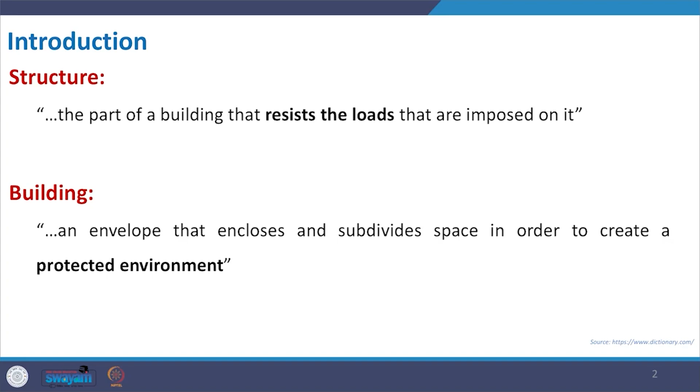Now, what is building? We learned the definition of architecture, where it was said the articulation of space with the application of technology and different science into it. Now, let us see the definition of building. It is an envelope that encloses and subdivides space in order to create a protected environment. I mentioned in lecture number 1 that in the primitive age people started building because they had to protect themselves from external dangers. It may be from the weather, it may be from other animals.

So, this safety, the protection, was the need to make something called shelter, and this envelope we normally name as building. A building may be a single room, like the lecture room I am standing in now, or a series of rooms put together to fulfill our need. For example, in a residential building we have bedroom, drawing room, toilet, then kitchen area. So, basically it is the division of space as per our requirement.

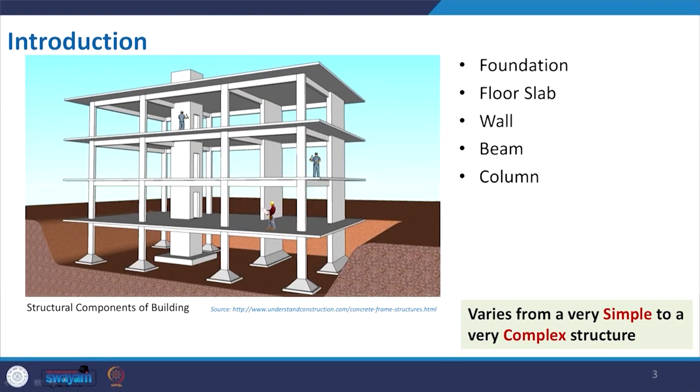Whatever I mentioned in this slide is very basic, simple, straightforward building, like an apartment building with a simple design and concept. Looking at the picture, we hardly get any idea about the material to be used or other functions. The moment we make it more complex, playing with different concepts and requirements, such as a convention hall where we cannot put a column in between and need it obstruction-free, the structural composition will change. So whatever the components of a structure, its parts and parcel, will vary from simple to complex structures.

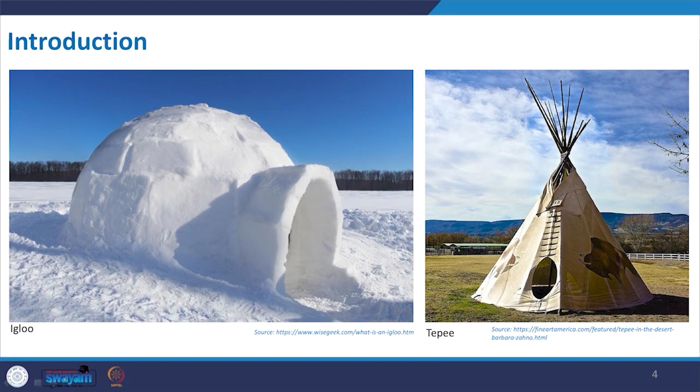Just as I mentioned compressive structure - compressive means if you compress any object, say for example this pen. If I give pressure from both ends, what happens inside it? It tries to compress, but since I cannot put enough pressure on it from both sides, the change is not visible to you. But if we perform it with a higher load, it will definitely collapse after a certain time.

There are structures that are tensile in nature as well. The conical structure is well formed and protects people from the weather. The concept behind both of these is basically to protect from the external environment, whether it's extreme cold weather or a scorching summer. As of now, these two are very simple to construct.

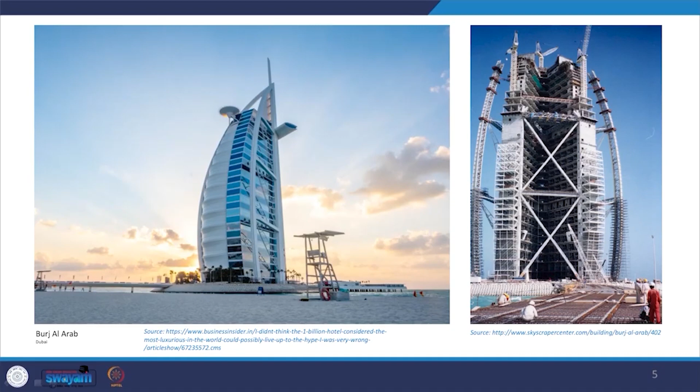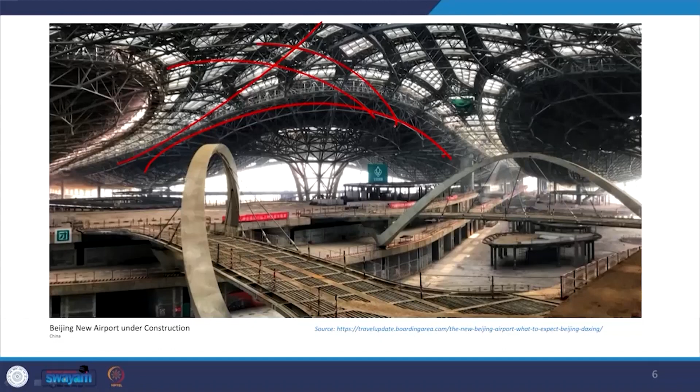You can see those different curvatures, and here not only at the roof, they play with different curvatures at different axes. It's basically creating that particular environment, that particular enclosure, with some flow. So in order to make it happen, we have to design the structure accordingly.

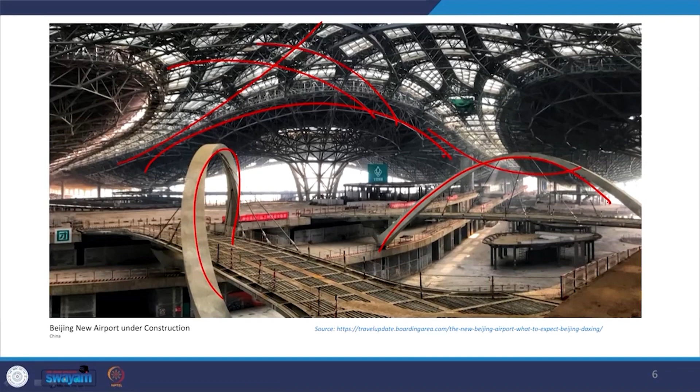Now, we have two ways. One, we restrict ourselves with a very straightforward composition and compromise our concept, we cannot go beyond that. But this is the time where we should go with what we want, and we support it with different structural advancement, and we apply technology to make it happen.

The moment we get a requirement that we need this much space, this type of space, we start generating different concepts, how we can make it purposeful, how we can make it different from existing ones, so that it makes a contrast to existing buildings and all will appreciate. So, to bring that wow factor into our building, we should really play hard in the concept stage.

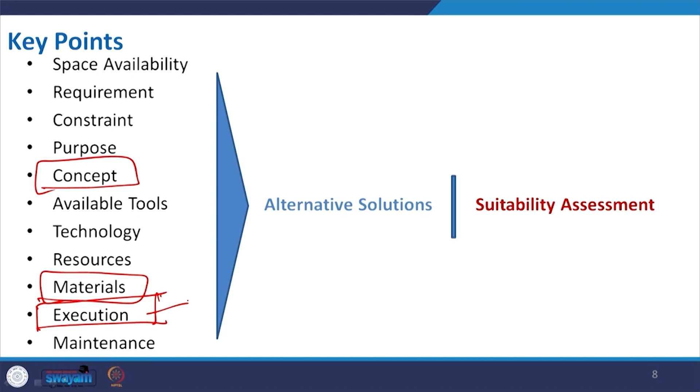Before we move to the next slide, let us understand simplicity and complexity. You can see I have a plain piece of paper, very simple. I can use it for writing, or if I fold it, I can make an airplane out of it. So with a plain concept, a plain blank paper, we can create many things.

But think about the structural point of view. If I try to hold this paper, it is not possible, because of the self weight and all. But if I just fold it, now it is standing. This type of structure we will discuss in the section when we discuss different types of structures we use in architectural field.

This is a folded plate - if you make it like this through trial and error, you get something like a letter M or W, but frankly speaking, it can also carry a load. Suppose if I want to put this slide changer on this paper, it cannot hold the load, I am scared it may fall. But with this folded form it may act as a stand without any external support. This is the beauty - a plain slab converted to a folded plate slab can solve many purposes. We will discuss this in detail.

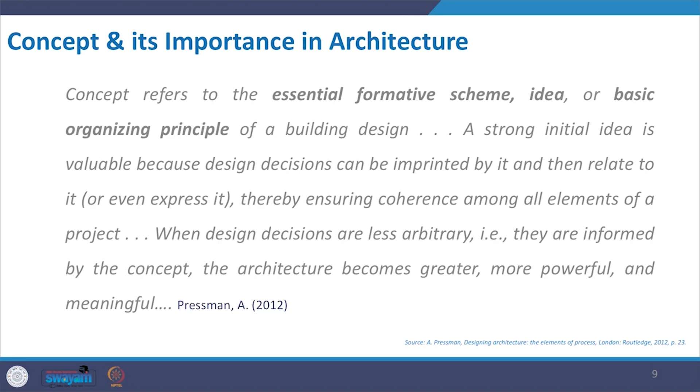Let us move to the next slide. In this lecture we primarily focus on the concept. What does Pressman say about the concept? Concept refers to the essential formative scheme, idea or basic organizing principle of a building design. A strong initial idea is valuable because it will be implemented, which requires cost, energy, manpower, everything. So that is very vital, thereby ensuring coherence among all elements - the space available, the structure to be used, everything is related to the concept.

Based on a book authored by Charleson, 'Structure as Architecture', concept and structure have a relation, and broadly we can classify concept into 4 pairs: order versus chaos, stability versus instability, static versus dynamic, grounded versus floating. Looking at the terms, we can get some idea what exactly they mean.

When you call something in order, everything is order, meaning it is very simple, straightforward. Chaos is scramble - like this abstract art I draw, it may be an abstract art but it is creating chaos, where I just make this arrangement. We can say order is like a 3 column, 2 row composition array.

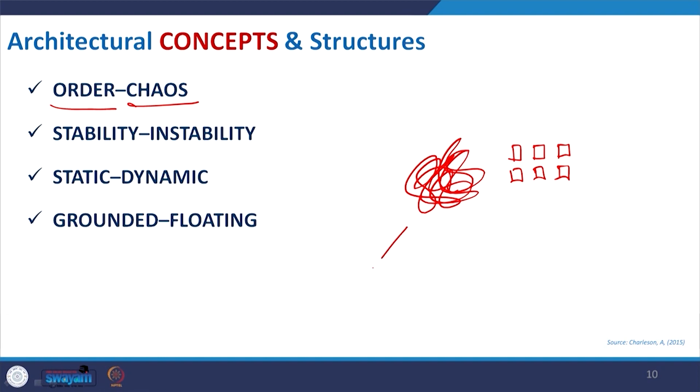Stability and instability - stability means, for example, this is an elevation from a site of a pyramid, and this is the ground. We can say this structure, this form, is very stable. Whereas if I make it inverted, it is assumed to be very unstable, but that is not a challenge because we can make it happen - there are buildings which have this.

Static means very straightforward, where we have a composition like this, and dynamic relates to the flow, which changes or gives motion when you look into the building.

We will have some curvature and other things. Then grounded and floating. Grounded means it has a feeling that it is anchored with the ground, whereas floating means it seems to be floated, but exactly it is not the real case, visually we will see. Suppose a building having heavier mass, standing on a very simple and narrow structural element below, this seems to be floating. So this is the overall idea.

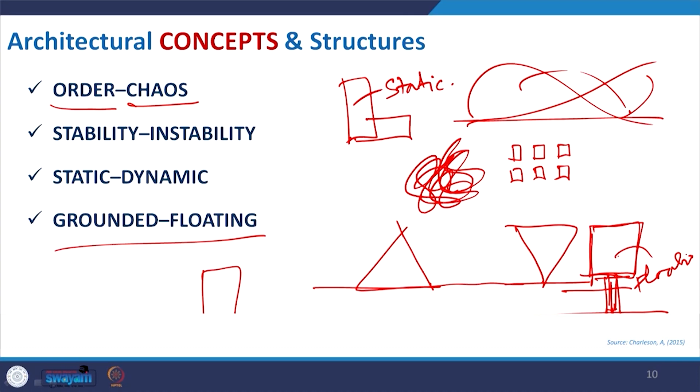Let us understand through a different case study. This is again a nice example given in the book Structure as Architecture, the concept of making architecture from order to chaos, and how it changes.

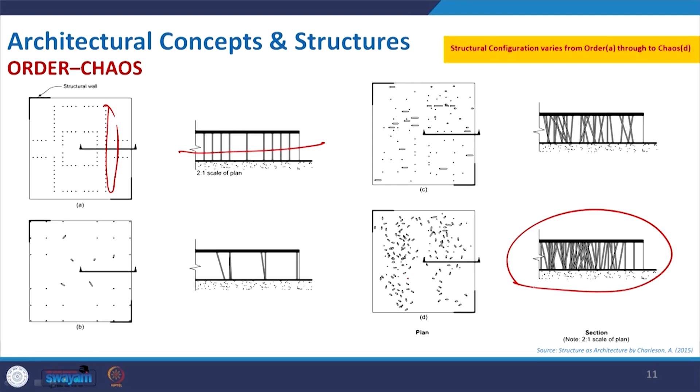In this plan, the dots are all columns placed in order, creating a very ordered form of architecture. Then when you start rotating it, it moves towards chaos, and finally when made very random, it creates this picture. This is the conceptual image.

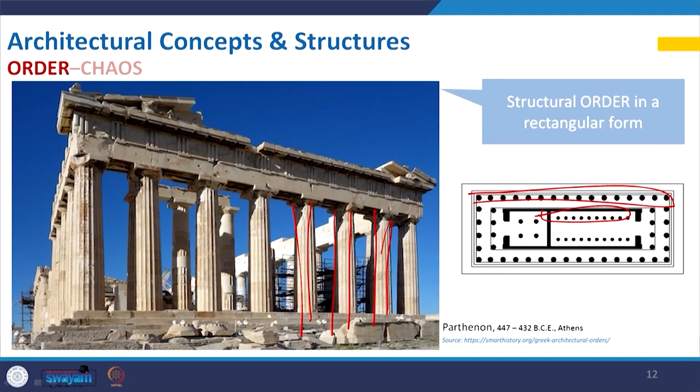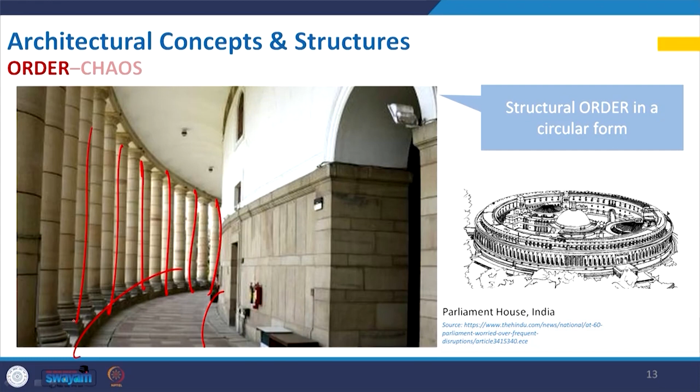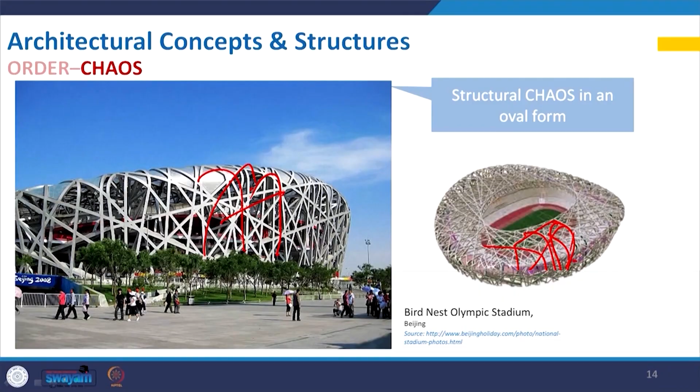Now let us move to chaos. Looking at the picture, you can understand the chaos. This is the Bird Nest Olympic Stadium in Beijing, China, a fantastic creation where the concept is taken from nature, the bird's nest, and the members are placed randomly, not in particular order. So it creates some chaos, but overall we appreciate the outcome. So it's not that we should always create architecture in order; sometimes perfect execution of chaos will also create a great experience.

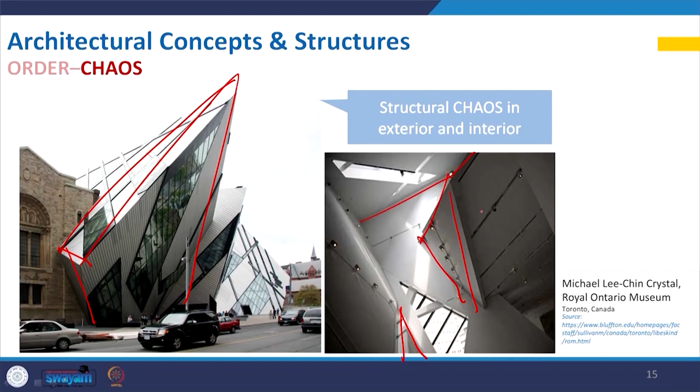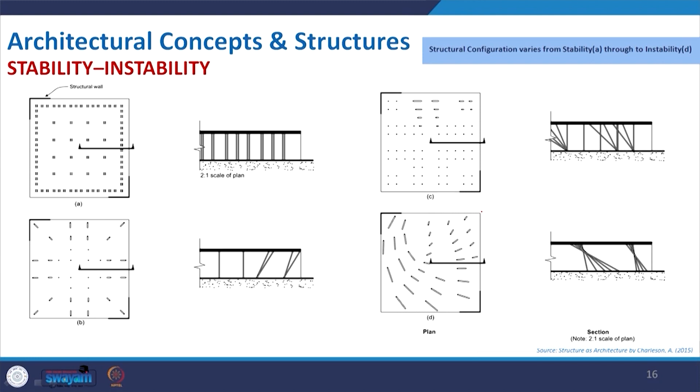Now moving to the next concept, stability and instability. This stability is not basically about structural stability; let us be clear, it is visual stability. Looking at a building, we say it shows stability or does not show stability, because a building looking unstable does not mean the structure is poor and may fall at any time. For visual stability, this picture is again from the same book, the reference is given here.

Here you see a proper arrangement in order, external columns and internal columns making it a very stable form. Now if you move through A, B, C and D, in D these are not regular columns, these are some other members, columns placed in a slant.

So, basically if we just try to draw, so this is one slab and this is another slab, we can connect it with this slant column, and in the unstable form that we create intentionally something like that, where we will feel that this particular column may fall. So, it is showing a visual instability to it.

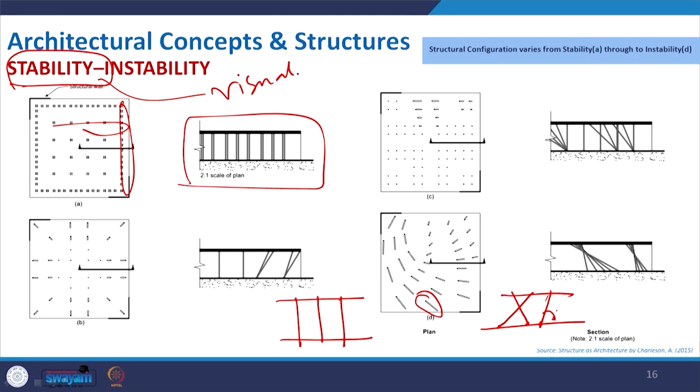So, let us clear this idea with some examples. This is the Law Courts in Vancouver. The structure is very massive, okay. But still, because we have this concrete support where you can see those space frames are being supported, here also you can see this supported. So, while walking within this space, you will feel a stability that this whole roof will not fall over you. So, you feel very secure and then you can say this structure is made very stable.

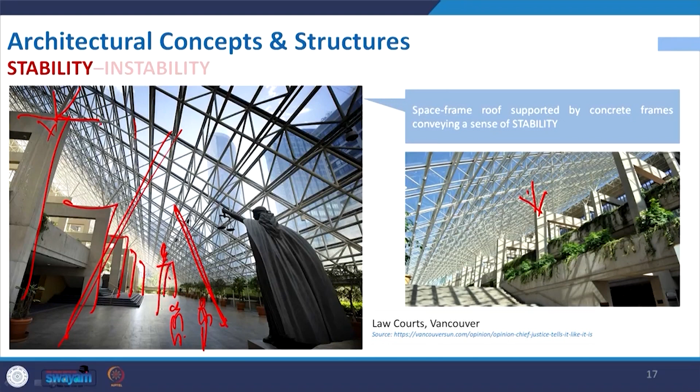So, space frame roof supported by concrete frames conveying a sense of stability. Okay, so, it is stable, structurally stable, and visually also we feel it very stable. But if you remove this and it is having just some slant random members, probably we will be scared. This is one example in the category of stability.

From history, an example is the Pantheon in Rome. So, here you see that huge domical structure as a roof, but this place feels very secure because of those members. So, if you see the whole domical structure being placed over different wall components and the columns, this gives a sense of stability.

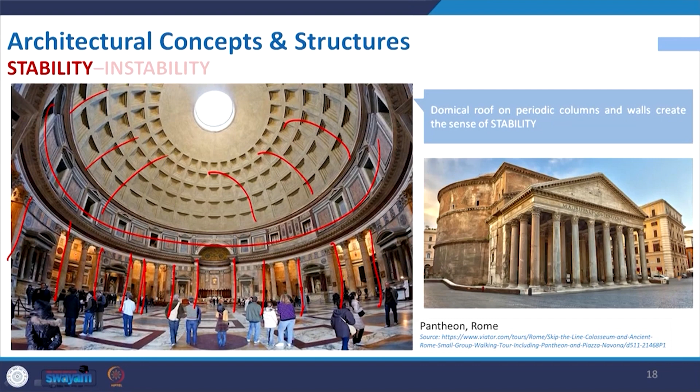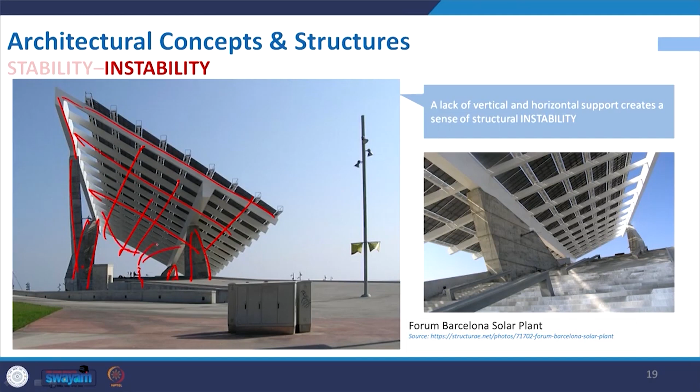Now, move on to instability. Forum Barcelona solar plant: looking at the structure itself, it is looking very dangerous, but structurally it is strong, stable, but visually it is looking very unstable because of the irregular piers on which this whole pergola is being placed. So, if you stand here and look into this structure, probably you will feel it very unstable.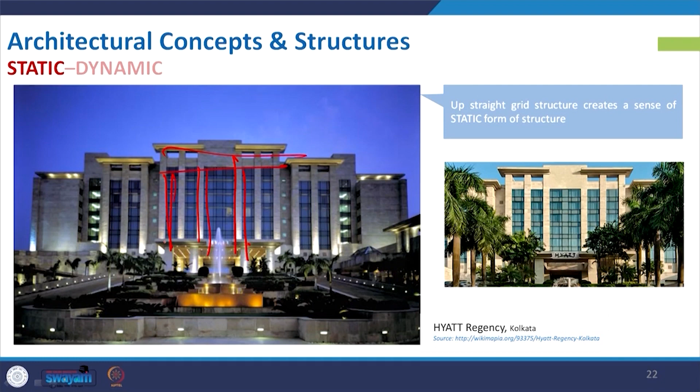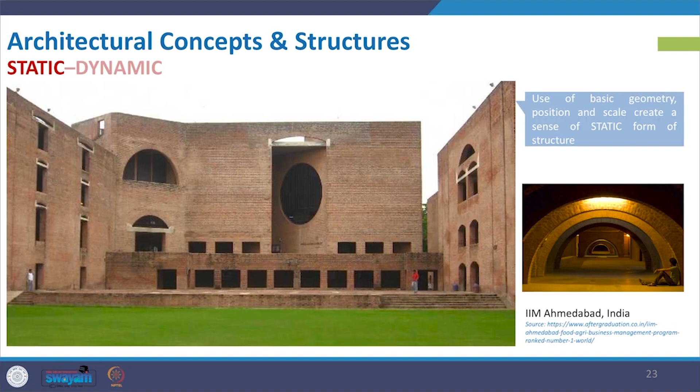Move to the next example, this is from IIM Ahmedabad. So, here also the heavy structure, the exposed brickwork, and the very straight form are giving a sense of staticness. Even the inside, like it is a series of semicircular arches, it is also creating a very static environment.

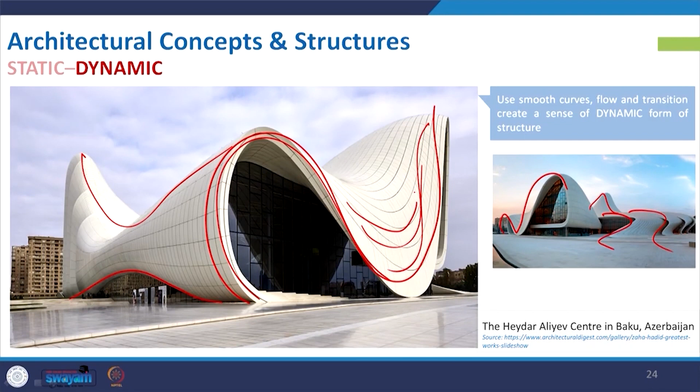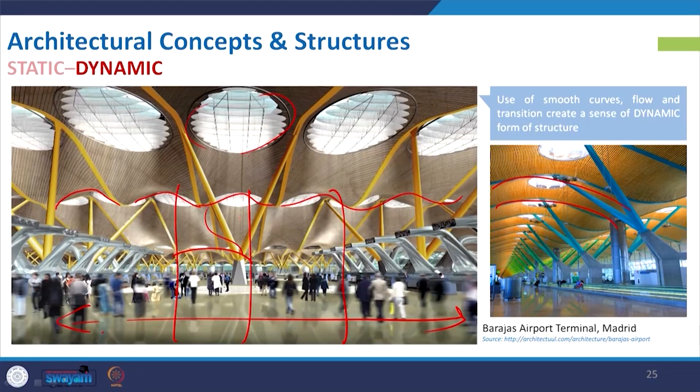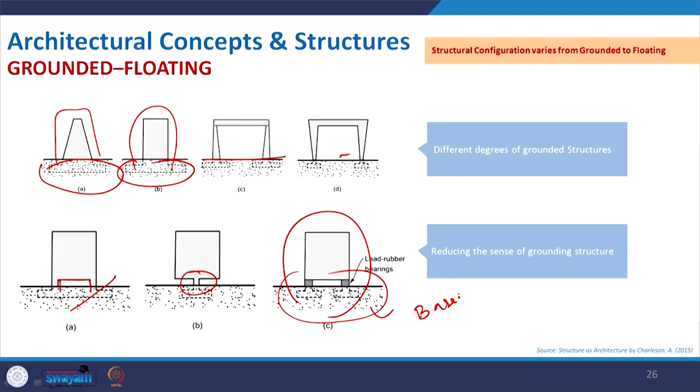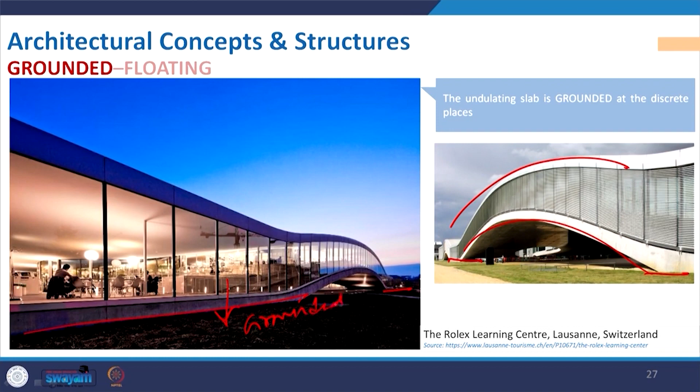So, let us clear our concept with some of the things. So, here the building is again a curve, but the interesting part is that it is grounded at different discrete places. So, we can see that it is anchored. Otherwise it may flow out or something. So, this is perfectly grounded. This is the Rolex Learning Center in Switzerland.

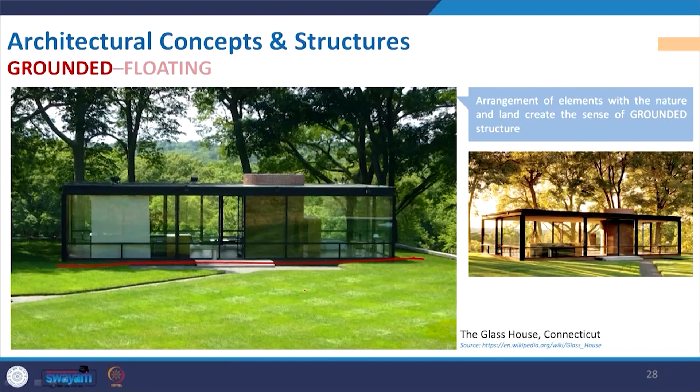Now, this example is a very famous example in the field of architecture, the glass house. So, here it is very simplistic architecture with glass and other transparent material, and it is perfectly grounded to the lawn. So, this is another example of visually grounded architecture. Now, come to the floating.

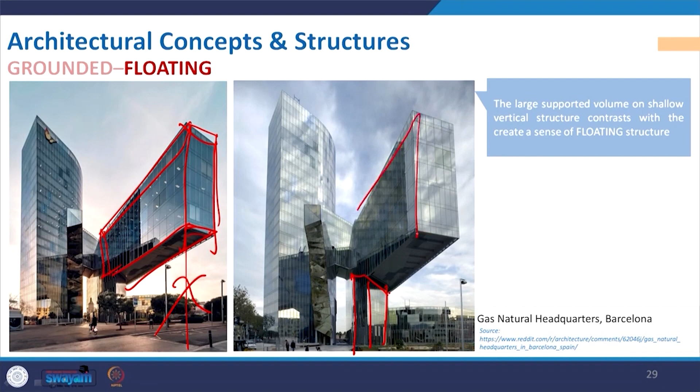But this is being created, and visually the building is stable, definitely that was taken care of, but this heavy mass with a shallow vertical structure creates a sense of floating. So, that is the overall idea to pick up this example. So, this is giving a visual sense that this heavy mass, this particular wing of the building, is floating. Now, move to the next one.

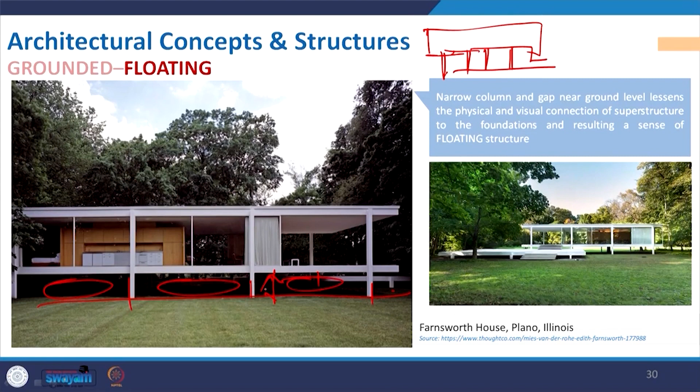So, all these examples we have seen are basically the concept. So, the concept was created to make it dynamic, and accordingly one has to select the appropriate structure that can fulfill that concept. So, to summarize this particular lecture, synergy between forms and structural elements is essential to bring the concepts into real world architecture. As I already mentioned, if we dream of something very dynamic, having large span, having very lightweight structure, we have to select the suitable structure for it.

If we go in a very traditional, conventional manner with a very limited structural form, very straightforward beam column, maybe many of our concepts will be compromised. The concept of architectural design is to be supported with appropriate structural form, and in order to achieve that one has to know the type of structure to be used, and in order to make that structure we also should know the material to be selected, because each material will have different properties in terms of resistance and strength.

So, we should also have a clear idea, and that is why in the whole course we will have some lectures on materials. Different kinds of materials give a visual look, but we also consider structure and strength, so they have different properties. So, when you see a building, we see the building material, we see different components of the building, doors, windows, etc. So, like that each component of a structure, whether it is material or form or different properties, we will discuss in detail in coming lectures.